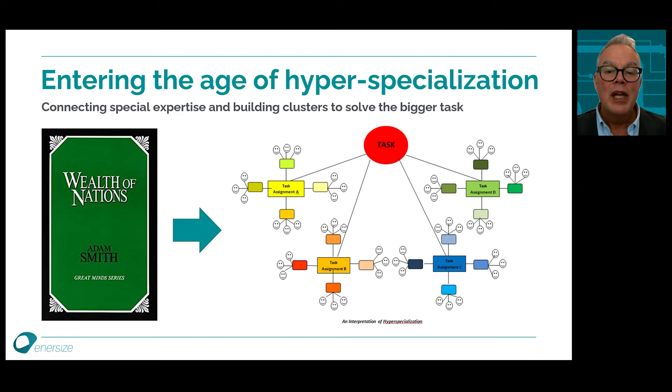You can say that the fact that Enersize is specializing on understanding the behavior of compressed air, which is quite nerdy in itself, I must say, makes it possible for us to gather experts in this space, turn their expertise and knowledge into software support and solutions that in its turn can serve a broad audience with decision support to deliver continuous improvement to the topic of energy optimization of industrial compressed air. We will look at some examples on how this is impacting our work, our partners, and our surrounding. But now let's look at today's agenda.

Well, after this introduction, I will hand over to two experts on compressed air, but they are also experts on software development. It is our own CEO, Dr. Anders Sjögren, and our partner and one of the world's most known experts of compressed air and pneumatics, Dr. Elvira Rakova, who works in Italy together with some of the main machine builders serving the global manufacturing industry. Together with Anders and Elvira, we will discuss how data capture, advanced visualization, and analysis can be used to build decision support for the office of the CXO.

We will also today meet our team lead from Research and Development, Rebecca Rubio Lopez, that together with our CEO will be looking at the roadmap and where we are investing from a product development perspective. Finally, we will be launching the new Enersize Academy, and it's Johannes Olsson, who is the head of Enersize Academy, who will be handling this launch. We are there celebrating that it's now fully available online. And after this, we are looking at sharing some of the upcoming activities before we end today's session.

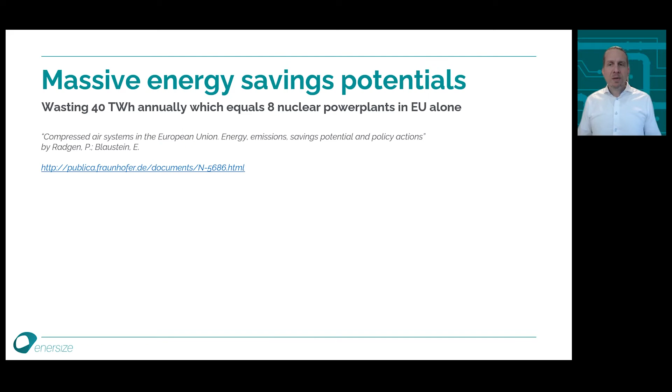So let's look at the situation in Europe. In Europe alone, more than 80 terawatt hours of energy is used for generating compressed air. And according to research, almost 50% of this energy is lost. The potential for saving is extreme. If we could save all that energy that is lost, it would equal around 8 nuclear power plants. Just think about the potential for the whole world. With today's energy shortage, we need to address these savings now.

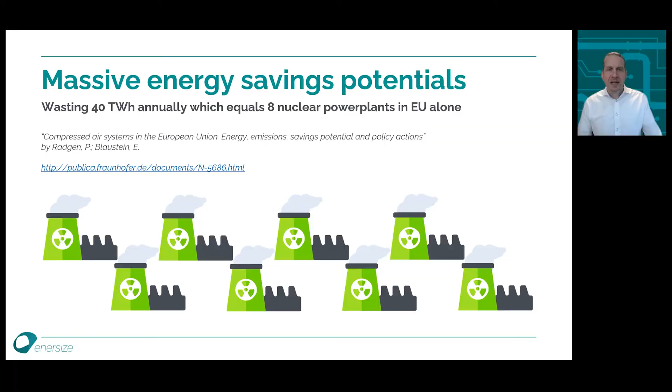But does that then mean that everyone has to become expert on compressed air? No, not at all. Enersize has packaged this kind of expertise into tools and solutions to make it possible for organizations around the world to address the energy savings available in industrial compressed air. And in Enersize, we've shaped the ambition to become the global champion of compressed air efficiency software. And what we do, it's built into the cloud. So there is no limitation on the scalability of our solution. Everyone gets served.

So what are the potentials that we're chasing? Is it just energy savings? No, in fact, the more we know about compressed air, the more we will be able to impact also other areas. In almost all plants, compressed air is used to run production processes. If the supply of compressed air is unstable or it does not meet the quality requirements, scrapping or even unplanned production stops might be the consequence.

And I can give you an example. I was in a conversation with a textile manufacturer in India. After optimizing their compressed air system, they also realized that the more stable air pressure resulted in less thread breaks during weaving of fabrics. The quality of the textile was increased, and the manufacturer could sell it at a higher price.

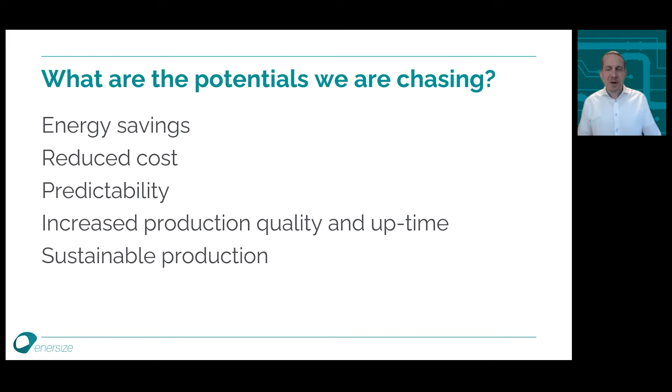So no matter if you are the CFO, plant manager, sustainability manager, or maintenance manager, there is ample motivation to have as good insight into your compressed air system as you have in any of your production processes. And by the way, did you know that compressed air is the most expensive energy source that you are using? So what are you waiting for?

At Enersize, we care only about creating and maintaining energy-efficient compressed air systems. That's why we are good at it. We monitor signals relevant for compressed air, we analyze them, we generate KPIs and reports relevant for decision makers. But even for us focusing so much, there are opportunities for other experts to become part of our ecosystem and contribute with customer value. Did you think compressed air is simple? It is not. So why would you try to reinvent the wheel and try to fix your compressed air system on your own? Through Enersize and our partners, you get access to international expertise.

The digital landscape Enersize is operating in has become quite complex over the years. We refer to this as top floor and shop floor. Information is integrated, consolidated from the shop floor's operational technology that is running the production to the top floor's informational technology that is used to take decisions.

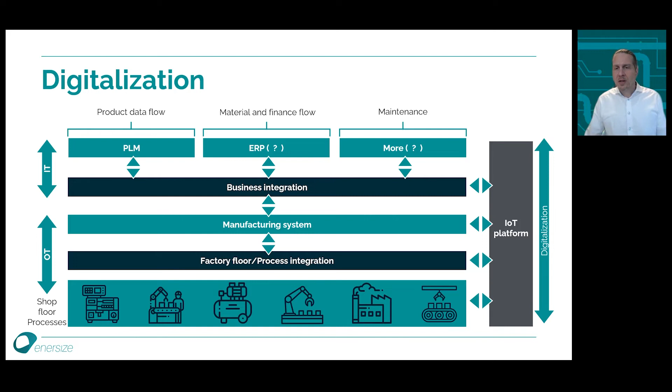Everything around us is getting more specialized. I mean, 200 years ago, you could get well educated in all the sciences. And then 100 years ago, you could choose to learn about physics. And these days, you can become expert on compressed air. And similarly, the industry also requires more specialized solutions. And it's very hard for a single supplier to cover all of these areas of expertise. Good is not enough. You need to be expert. That's why we're starting to see more and more digital platform solutions that incorporate highly specialized services from sub-suppliers.

So it's easy to understand that Enersize cloud solutions are part of a much larger infrastructure. Digitalization of industry is paving the way for interoperability, for different systems to communicate. That's why open standards are so important. Open standards guarantee that systems speak the same language.

I want to show you a concrete example of how information needs to flow between stakeholders in order to energy optimize a compressed air system. And this is Enersize home turf, so it's essential that we understand who are the stakeholders, what are their goals, so we can develop services and solutions that have customer value.

We are dependent on technicians to perform various energy-saving actions in the compressed air system, and the technician starts by collecting information about the compressed air system. Enersize Compressed Air Services in the cloud is used by compressed air experts to get insight into the plant's compressed air system, based on information collected by the technician.

In the back end, researchers are diving into the data from the plant's compressed air system, utilizing machine learning to automate the process of generating decision support. All stakeholders share the same objective, but how can we make them work together? Enersize is building tools that make it possible for these people to contribute.

I will talk more about the new architecture later in this webinar, but for now, let's just say that we're using state-of-the-art technology to accomplish this goal. At Enersize, we're building a system in the cloud that will offer opportunity for us to cooperate with other experts in compressed air. And today, I have with me a true expert on compressed air.

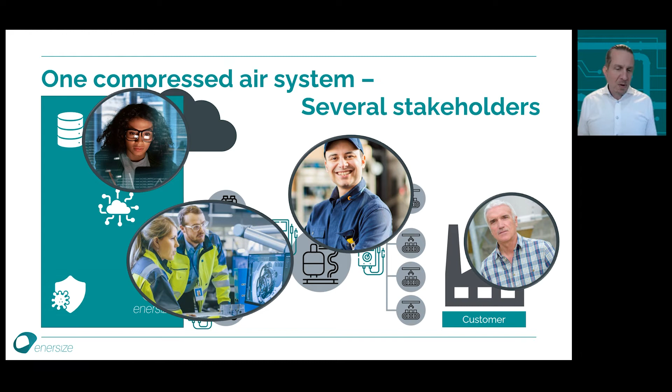Welcome, Elvira Rakova. I know you're also an entrepreneur and that you're developing solutions for energy optimization of compressed air. So please tell me more about your work and your challenges, Elvira. Yes, hi Anders. Thank you so much for having me here. I'm really happy to be on board with Enersize to reduce energy consumption of compressed air.

I just want to add a couple of thoughts about how important the optimization is for all stakeholders inside the company, and how the software can help them speak the same language. So let's see what we can achieve by reducing energy consumption. Obviously we have cost reduction, but it's related not only to energy cost, we also have downtime cost reduction and maintenance cost.

So this is a very big part that I'm sure the CFO and CEO of the company would be really interested in. Of course, we also have product quality and capacity. Sometimes it can be hard to quantify, but we can achieve a really nice reduction of defective products. We also can increase capacity. A concrete example of the reduction of defective products is related to the air quality.

In pet and in food and beverage, the air quality is very important, and each small piece of dust can really ruin a lot of products, unfortunately. We need to monitor it. The second thing is, of course, the product capacity. By optimizing the pneumatic system, the compressed air system of the machine itself, there are really good use cases where we could see that the machine worked faster. Up to 25% more pieces could be produced. So I'm sure the operator and maintenance manager are really happy there.

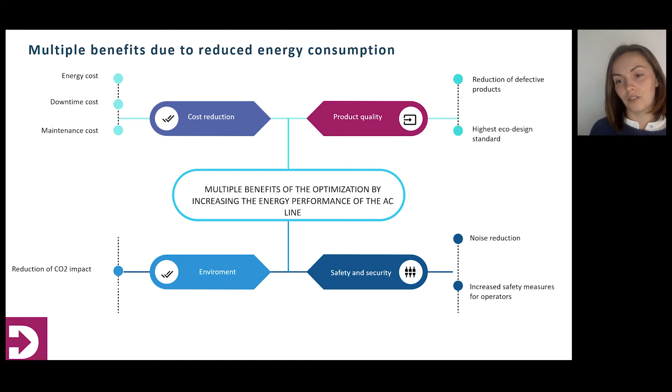And I think actually that the software can help people a lot to understand each other. Of course, on the bigger level, if we see the company working all together and understanding in the perfect picture, we can achieve the high value proposition. So the company can offer a safer, high quality work environment, and also high production capacity, lower carbon products, and improved product quality and consistency.

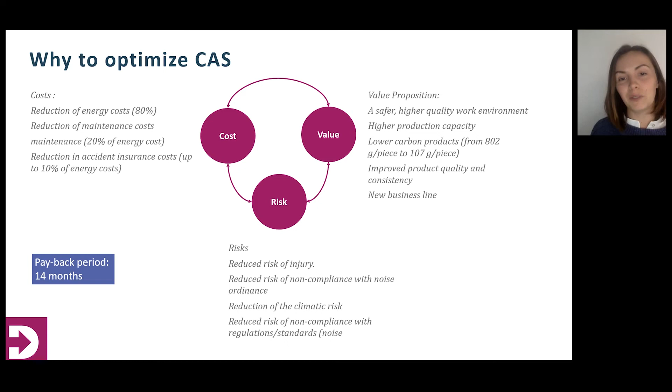And also reduce risks, for example, risks of injury, risks of non-compliance with noise ordinance, and the reduction of climate risk. And I think the most important thing is it's actually not software or hardware, it's really this human part where we can help people to remove confusion by providing them not a big data analysis, but rather smart data where they can take an actual action.

So the operator will understand when he needs to change components, pneumatic components, for example, a filter or a cylinder, and when he has to order this. So his production will be on top performance every single day. And for example, the energy manager can see what the most expensive hours for energy consumption are and how exactly he has to run the compressor there. And I think removing the confusion in compressed air and helping people by providing those tools can really make their work much, much easier. And I think this should be our goal.

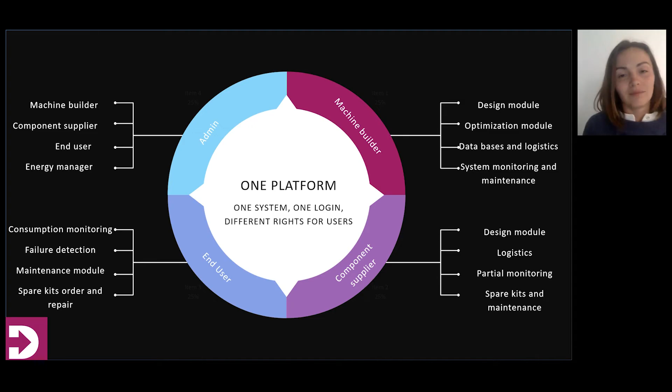Okay, thank you so much, Elvira. It was a truly interesting presentation, and I think you're both illustrating the benefit of specializing and with that delivering value based on true expertise.

But I would like to start going back a bit to what Anders talked about with the Agenda 2030 and the fact that within a fairly limited number of years, the world should be much more energy efficient. And I would like to discuss this with you because in compressed air, there seems to be an untapped and quite big potential for energy efficiency and energy savings. But is there anyone that gets rewarded if we manage to save this energy? What is your experience, Elvira? You work close to the industry in the Italian landscape.

Yes. Thank you. I mean, the obvious KPI of energy consumption reduction is most important for the energy manager. But as you know, middle and small companies don't have an energy manager. So we usually have maintenance, safety, and then the CEO and CFO. And in those companies, no one gets rewarded for that. And I think this is a little bit of a missing link, because the energy consumption in middle and small companies is not directly linked to the process.

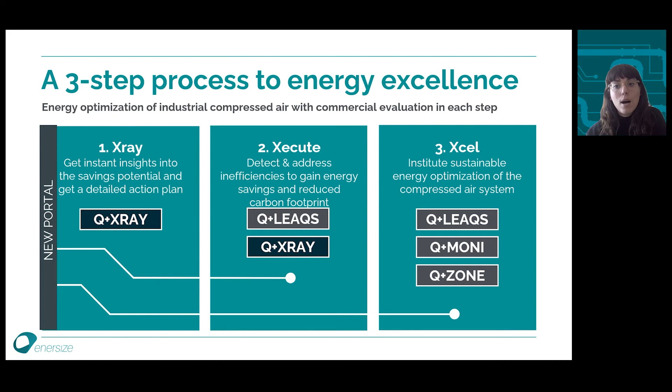And you may be asking yourself, why do we need this portal? Well, the portal will allow us to provide a clear and user-friendly interface to make the collection of the data as simple as possible for our users. We have defined three different kinds of users that are going to be able to interact with this portal. So let's see how this tool can help them in this process.

Our three main user personas are the customer technician, the partner salesman, and the expert that will review the data and give feedback to our customer technician. Let's see some of their specific functionalities to be able to understand the portal better. And let's start talking about the customer technician.

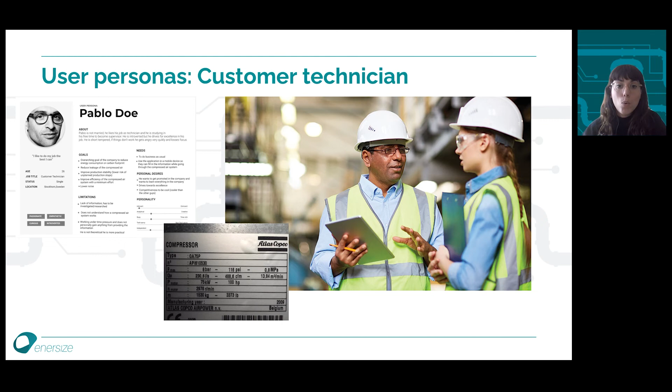They are usually the users who are in charge of filling in all the details regarding the compressed air system that they manage. We know, based on years of experience from our in-house experts, that this process of data collection is often really tricky and sensitive. So we aim to make this task as easy as possible for the technician. So we want to provide software good enough to avoid mistakes and to be as accurate as possible with the collected information, and of course, to be easy to use.

And to accomplish that, in our portal, the customer technician will be able to select different units for each property that describes the compressors when they are filling in the data about the compressor system. This functionality will make the portal usable across different countries because we all use different units. For example, to measure the pressure of a compressor in North America, they use a unit called pounds per square inch, and here in Europe, we usually use the bar unit.

So I personally think that this is a really nice feature and a good advantage for the customer technician user, because if they are able to select different units, they don't need to waste time making calculations or transformations of the data. The portal will do it automatically for them. And in that sense, we also prevent mistakes or wrong information. So let's continue understanding the expert user persona better.

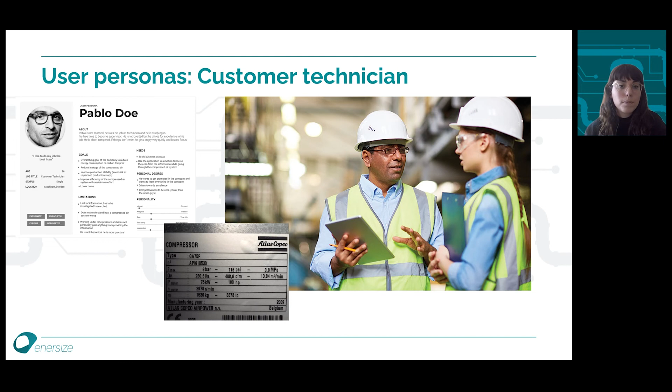And regarding the expert, I will say that one of the key features of the portal is strongly connected with the user persona that we have defined as the expert. The expert will be in charge of verifying the data that the customer technician has filled in the portal. The expert user is somebody with a lot of years of experience analyzing and monitoring different compressor systems around the world, so they can provide valuable feedback and ask questions to the customer technician through our portal, using, for example, the checkbox that every property will have, or also using the comment fields that we will have in the portal.

When the expert has verified that the data collection process was done correctly, then we will have all the information to move forward and get a detailed action plan and to provide energy savings and energy optimization for the compressed air systems of our customers.

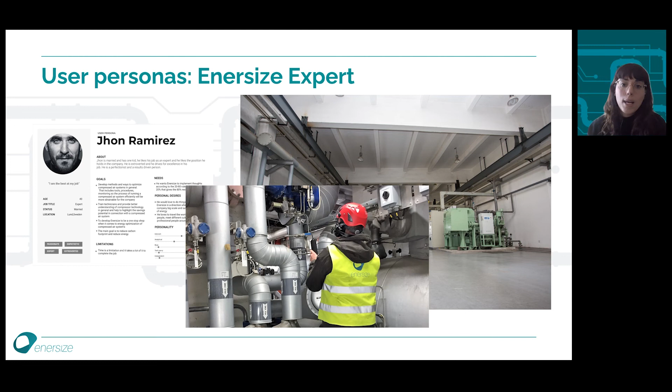Let's talk now about the third user persona then, the partner salesman, and how this is connected with the portal. We have also defined this user persona for our partners. And thanks to an agreement with Enersize, our partners are going to be able to use the portal as their central software for some of their operations. For example, in the future, they will be able to register new users, to create accounts for their partner technicians. They will also be able to monitor the status of the data collection process, etc.

So we can say that in the future, our portal will be the central point of most of the Enersize users' operations. So that's really exciting to be able to develop a product that will fulfill a lot of the needs of our users. And as you see, we have a lot of development to be done in our roadmap, and we will be giving you the updates from the R&D department team in the following webinars.

Many thanks, and now I will hand over to you, Anders, again. Great presentation, Rebecca. Thank you.

To measure is to know, said Lord Kelvin already in the 19th century, and this is the foundation of everything we do at Enersize. We are, through measurement and analysis, breaking new ground, and our analysts and researchers are step by step inventing new ways to provide value to our customers in their aim to reduce energy consumption.

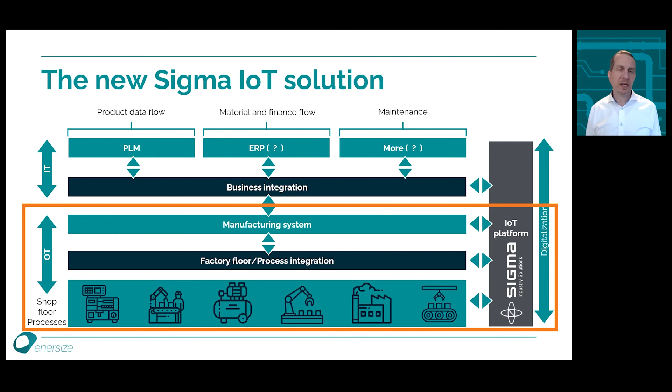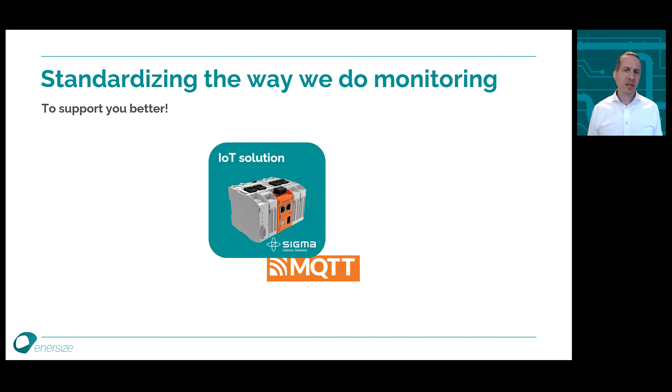I will explain what we do in a slightly different way to make it clearer. The IoT solution we are standardizing on enables communication between, on one hand, the sensors on the shop floor that measure the compressed air system, and on the other hand, Enersize cloud software. Today, I can report on pilots using the IoT solution showing great results, and that will improve all steps from installing, configuring, and maintaining a permanent monitoring system. But most importantly, the new IoT solution provides better insight into compressed air systems, which guarantees that we can support our customers better.

The pilot results are actually even better than I was anticipating. We have increased the data acquisition rate from once per minute to second-based, which means that we can track very fast changes in a compressed air system. Installation cost and complexity has dropped significantly. Our data analysts get around 1,000 times more data to analyze, which improves the probability to find issues and to not only find opportunities for energy savings, but also to reduce the risk for unplanned production stops. For our partners who handle the installation of equipment on site, the possibilities to troubleshoot remotely have increased, as we now can do sensor health and configuration checking anywhere in the world.

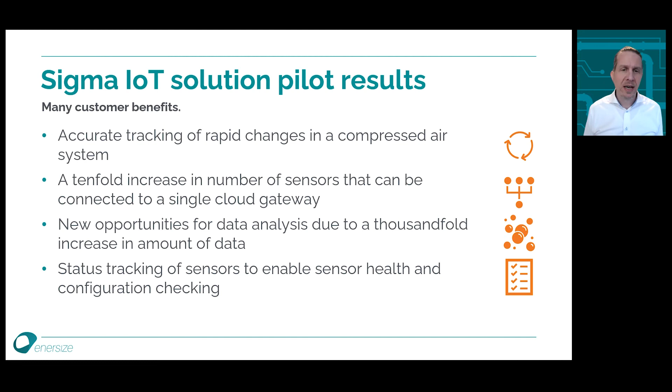I was talking earlier about that good is not enough, and that there is a need for more specialized services. And this is true not only for services, but also for computerized systems. We are living in an age of hyper-specialization. We at Enersize are specializing in measuring, analyzing, and modeling compressed air systems. But of course, we also need to make sure we can communicate with other systems, as we are providing such a specialized service.

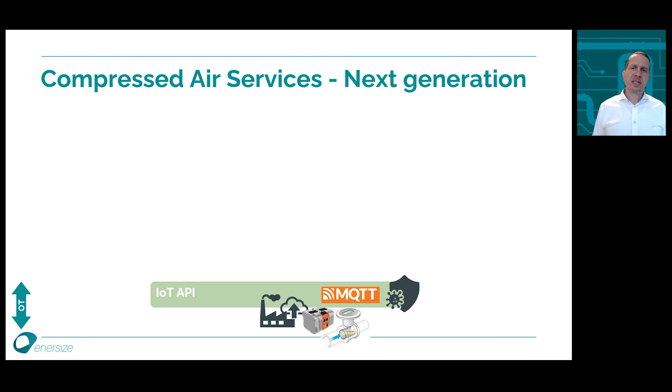We are now developing the next generation of the compressed air services in the cloud. So let's look at how the system is designed. We have the sensors and IoT solution on the shop floor, and they communicate through a standardized application programming interface, an API, to Enersize compressed air services in the cloud. Data is handled by an event-driven architecture where microservices are subscribing and publishing more and more refined data and KPIs. The users interact with the cloud through devices that connect to REST APIs.

The data API is important to allow other software services to analyze data or to subscribe to results. Not only can we work with other compressed air experts, such as Elvira that we were talking to earlier in this webinar, but also with standardized IT solutions such as enterprise resource planning systems or maintenance systems. As the services we develop are quite specialized, there's also an expectation that we can deliver and explain the value of what we deliver. What kind of value can the customer expect?

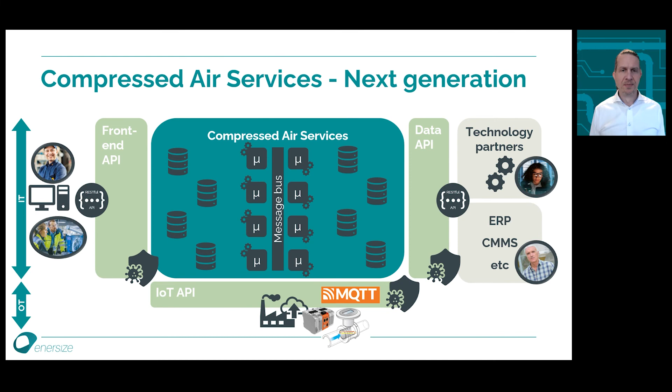This is a development not specific for Enersize, and we see a future where service companies in general sell results rather than subscriptions. And in line with this, we at Enersize have decided to go into a benefit-based model. You pay a fraction of the benefit after we have delivered and measured it. The pricing model we have developed is, as I said, benefit-based, and it's built on a 3-year agreement. Enersize will cover all upfront investments in software and hardware needed to gather data for identifying and addressing energy optimization potentials in the compressed air system.

Enersize will, as part of the optimization, also cover the cost for doing leakage surveys and repair, including the components that are motivated to repair or exchange. There is no hidden risk. There is only an upside for the customer, as we are so confident in our ability to identify and address potential energy savings in the plant. Enersize and our partners use the 3-step implementation model to establish the original energy baseline, and from this starting point, establish a fast track to value by delivering energy savings.

On a quarterly basis, the customer is being invoiced 50% of the energy savings delivered compared to the original energy baseline, creating a mutual incentive to identify the best possible energy optimization of the compressed air system.

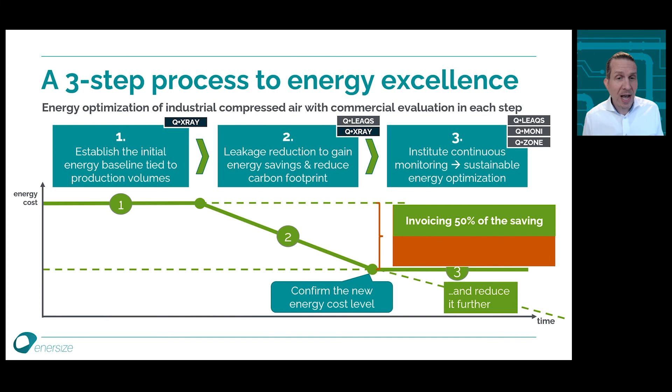So before we end the session, I'd like to hand back to Rebecca, because I know you are looking for customer engagement. Rebecca? Thanks, Anders.

So let's take a look at what we have accomplished so far. The Enersize Academy is now complete version 1, and it's ready for anyone who wants to learn more about compressed air in the industry. If you're a technician that will work hands-on with leakage management and compressed air system optimization, this is for you. We have created 11 courses containing 50 lessons with over 4 hours of video material. Combined with integrated quizzes between lessons, practical training on site, final exams and certifications, we can now deliver a very immersive education for the Q-XRAY and Q-LEAQS systems.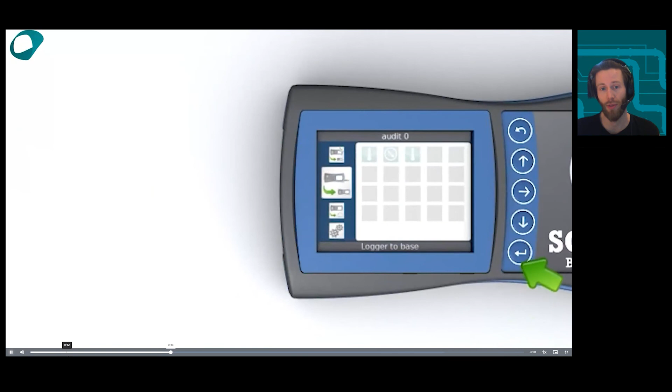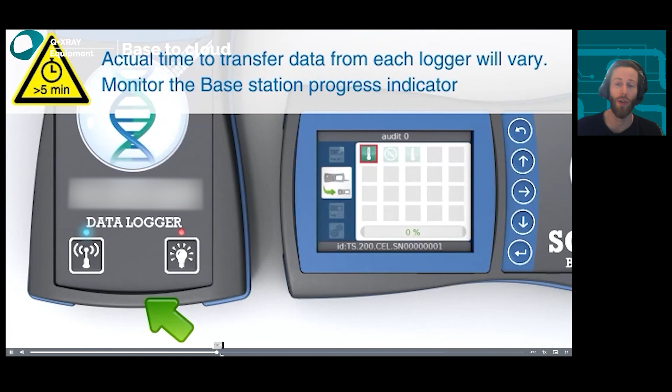So what does this mean? It means that our students will learn about general compressed air use, how to find and repair leaks, and finally, how to measure both the supply and demand side of the compressed air system in a factory of any size. Our training material is for technicians in the field, but also for anyone who wants to learn more about general compressed air use, how it's used as an energy source and how to work with it in the industry. So all you have to do is contact me or anyone at Enersize to help you get started.

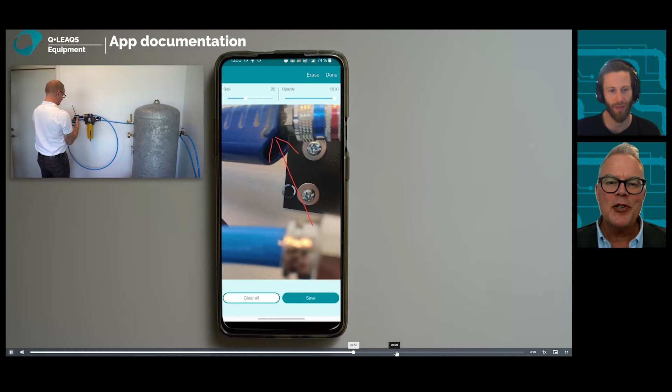And that's it for me. Thank you so much, Johannes. What a great experience. I am so happy that we finally have Enersize Academy up and running, live and kicking, online for self-service in the cloud. Thank you, Johannes. Great work.